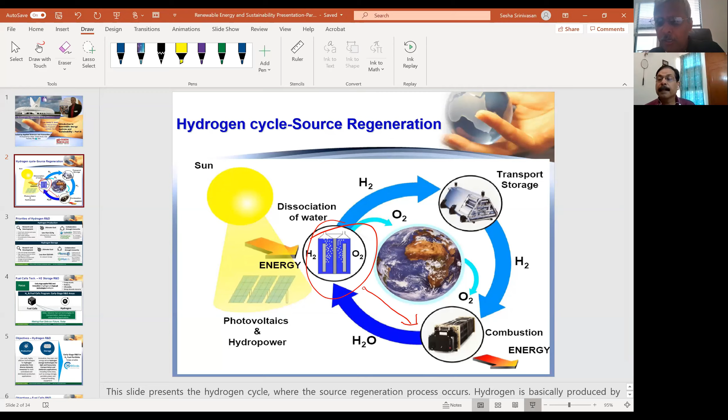Hydrogen you can produce from water and use it in an engine to burn or combust the hydrogen, or you can store the hydrogen in metal hydrides or any other medium. The overall byproduct of hydrogen combustion is water. Water is very benign; you can use it for drinking. So it does not contribute any carbon dioxide or carbon monoxide. It is free from greenhouse gases. There are challenges in using hydrogen technologies for fuel cells or internal combustion engine applications.

Okay, so let's look into the deeper side of it. In order to produce hydrogen for vehicular or stationary applications, the hydrogen production cost must be around $2 per kilogram. You need to produce within that cost range. Right now, we are spending more, like $16 to $20 per kilogram. So that is a challenge.

The second thing is hydrogen needs to get stored, because if we don't store the hydrogen, you cannot constantly run water to produce hydrogen and use it. You need a storage device. For the storage device to be cost-effective, you need at least $8 per kilowatt-hour of hydrogen storage. Hydrogen storage is a big challenge too. So implementing hydrogen for production, storage, and utilization all has to work out simultaneously so that you can use the hydrogen in fuel cells.

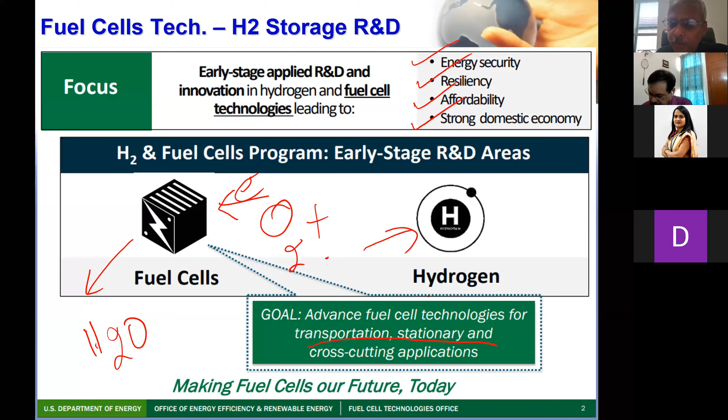So there are big challenges like the transportation sector and the stationary applications. You need to use fuel cells that use the hydrogen produced from water or fossil fuels. So we'll talk about that.

What are the objectives for hydrogen production? The objectives are you need to produce low cost, highly efficient technologies for producing hydrogen from domestic resources.

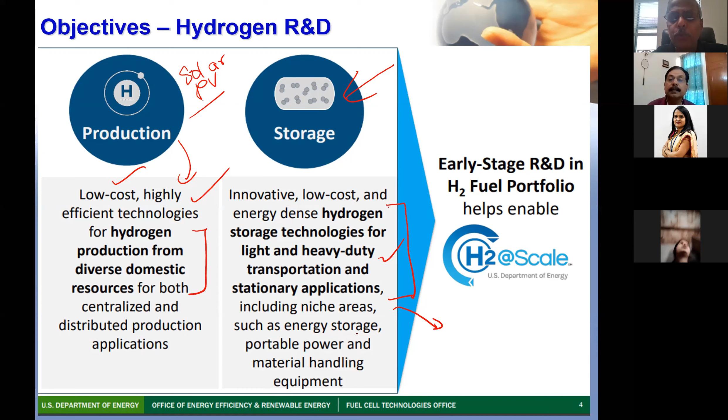So when I say hydrogen production, you need to produce hydrogen sustainably and from renewable energy sources like water, sun, or nuclear. You cannot use non-renewable sources. You need to use only renewable sources.

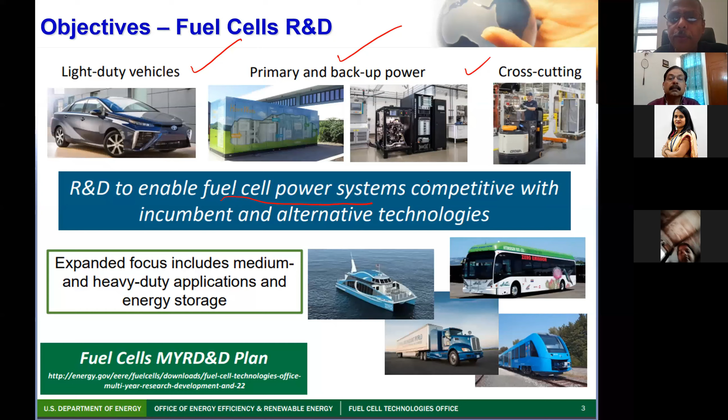For hydrogen fuel cells, the hydrogen combines with oxygen. Hydrogen fuel cells are used for the transportation sector, for backup power, or for laptops or other electronic applications. The fuel cell power is nothing but taking hydrogen and oxygen and converting it into electricity to drive your vehicles. This is completely free from carbon dioxide.

The cost is very challenging because producing hydrogen, right now you have to always compare it in terms of gallons of gasoline equivalent. Right now we use gasoline in our cars and vehicles. In the US we say it's gasoline. It's the same thing as petrol, petroleum. So you need to convert that in terms of prices.

Right now, the gasoline gallon equivalent is $16 for every gallon. One gallon is 4 liters. 4 liters of gasoline, kerosene, or petroleum is equal to $16.

But the Department of Energy's ultimate target is to go down to $4 per gasoline gallon equivalent. So that's a challenge there. There's a big gap there.

You're going from natural gas, a fossil fuel, to produce hydrogen, to electrolysis. The electrolysis process is highly renewable compared to natural gas. You can also produce hydrogen from methane. CH4 is methane, you get carbon plus H2. You can get that, but that has some carbon footprint.

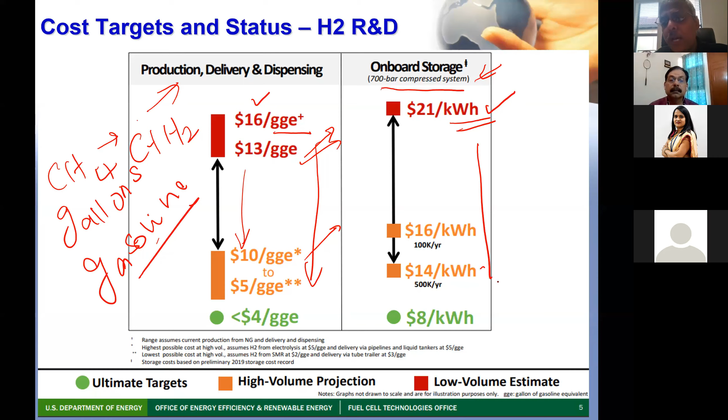Then hydrogen needs to be stored. Right now they store hydrogen at 700 bars, 700 atmospheres, in compressed cylinders. They pay $21 per kilowatt hour to store that 700 atmospheres of hydrogen. But that cost has to go down. That's a big challenge as well.

The next big implementation is fuel cells. Fuel cells are very expensive, but can be applied for clean energy and green energy. Right now the fuel cell cost is $40 per kilowatt of energy produced. That's very expensive. The Department of Energy wants to bring it down to $30, while keeping 65% efficiency, and the durability should be increased to 8,000 hours.

Right now, the gasoline car with an ICE, internal combustion engine, has only 30% efficiency. The rest of the 70% goes as waste heat. The fuel cell is a device which converts up to 65% efficiency, which is 2 to 3 times more than internal combustion engines.

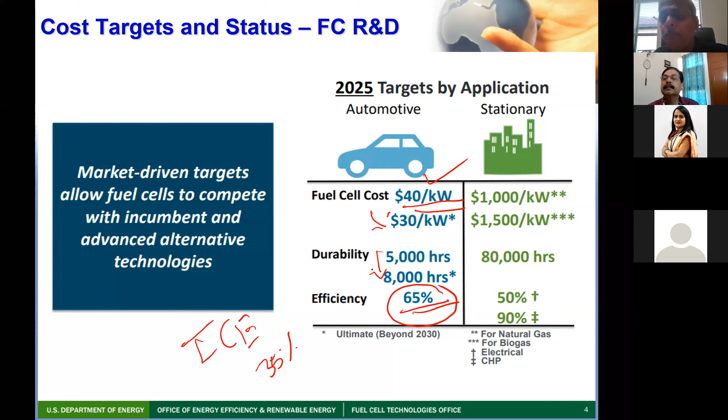You can either produce it from fossil fuels or coal, because in the US, or in India, we have a repository of coal. You can produce hydrogen by burning coal.

You can also produce hydrogen using steam methane reforming, that is SMR, or from waste products like biomass feed, using digester technology. Or you can produce it via solar PV photovoltaics, like low temperature electrolysis, high temperature electrolysis, or direct solar thermochemical. Solar thermochemical means you have solar energy and a thermochemical reaction occurs, producing hydrogen.

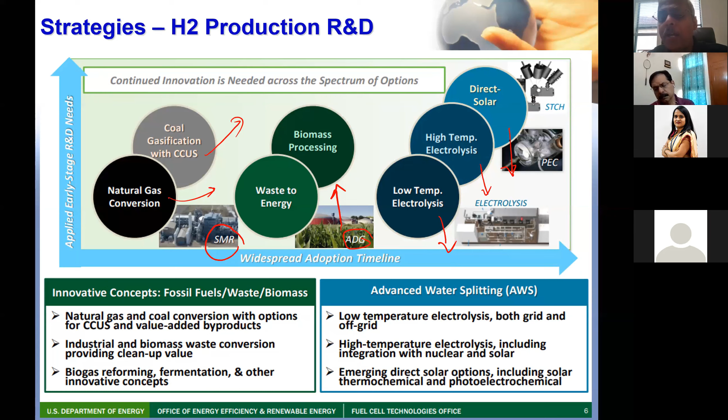So each technology has its pros and cons, advantages and disadvantages. You need to understand why hydrogen is taking too much time to come into the market, because there are intrinsic problems with each technology to address, not like electric vehicles, which I was talking about last week.

The same thing applies to hydrogen storage. You can store it, but why do we need to store hydrogen? Because otherwise, hydrogen is a very light gas. If you just let it out, it will evaporate.

Once if it leaks, then all the hydrogen is gone out. You need to store it in high pressure cylinders like composite cylinders, or liquid hydrogen like the BMW cars are running with cryocompressed liquid hydrogen, or you can store it in low pressure hydrogen carriers using materials. Materials technology is very important. I'm working on hydrogen storage, where we have to develop materials for storing hydrogen reversibly, like carbon materials, single wall nanotubes, graphene, or other complex materials.

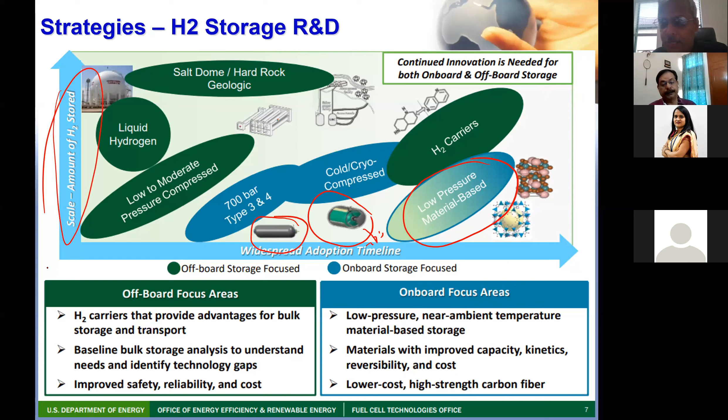So there's a big challenge. The scale of hydrogen storage has to be increased. That is very essential to keep up. And then the fuel cell technology, as I said, we need to increase the durability to 8,000 hours, or you can reduce the cost to $30 per kilowatt. There are big gaps that need to be addressed.

That's why we call it PGM free. PGM is platinum group metal based materials. You are not supposed to use lead as a base for developing the whole catalyst for working in fuel cells. That's a big challenge. There are many gaps that need to be filled so that you can get hydrogen fuel cell cars into the market and commercialize them.

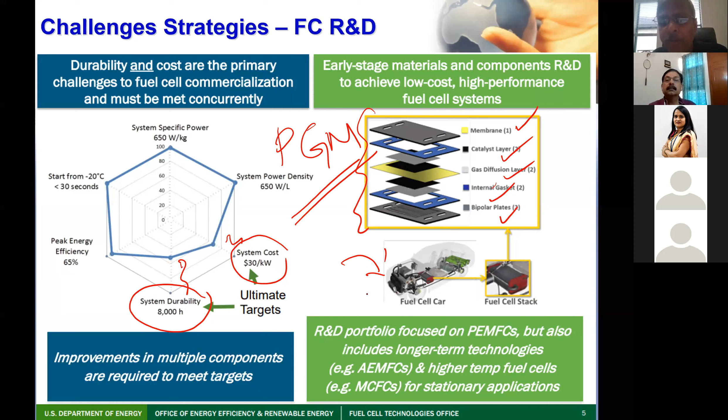So for production or utilization, hydrogen is a source of energy. If you calculate the equivalency of gasoline with hydrogen, hydrogen is 2 or 3 times more than gas equivalents in terms of energy density. So the energy density is higher, so you can use it for transportation, or for syngas production. You can also produce synthetic gases, or use it for combined heat cycles or metal refining. Hydrogen can be used for many processes.

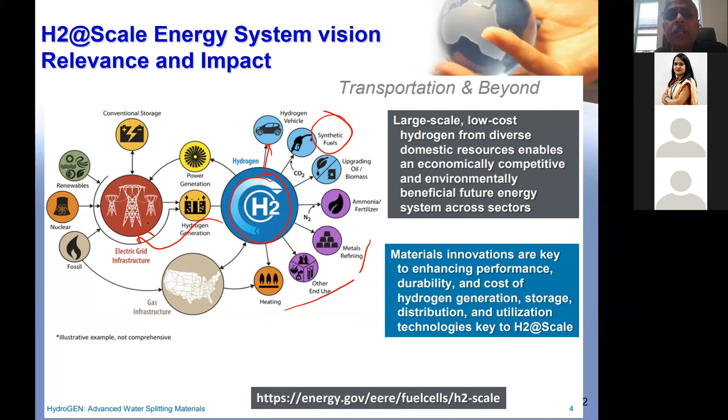At the same time, hydrogen can also be used for electricity production, for grid electricity, and you can use it as a renewable energy source. When I was working with BHU, Banaras Hindu University, I worked heavily with one of the professors, Professor O.N. Srivastava, who is a Padma Shri awardee, working on these hydrogen technologies for vehicle transportation.

So overall, in order for hydrogen to come into the market, your materials need to be designed uniquely, so that you can get materials development, the discovery of materials and development of the material, optimization, system integration, and certification. All this process goes in a chain reaction, so that you can get hydrogen compatible materials, breakthroughs in hydrogen storage, advanced splitting for hydrogen production, or fuel cell developments. It's a big R&D effort needed for materials working across different sectors.

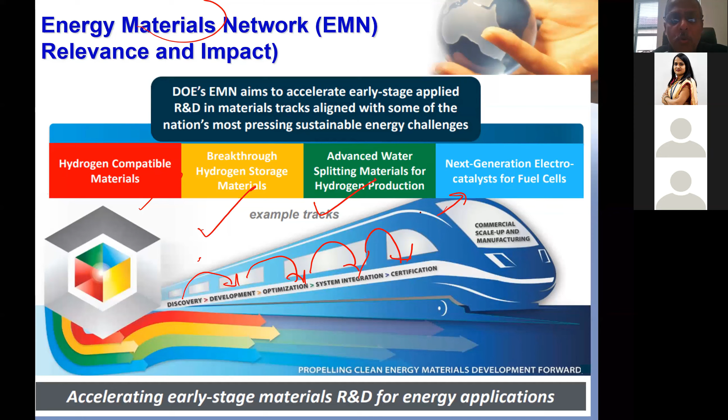All right, for production, you have 3 or 4 different techniques. You can use photoelectrochemical solar hydrogen production, or direct solar thermochemical hydrogen production, or low temperature electrolysis, or high temperature electrolysis. There are a number of energy labs in the US and in India working on solar hydrogen production, so that you can keep down the cost, or at least cut down the cost, so you can use it for hydrogen fuel cell applications.

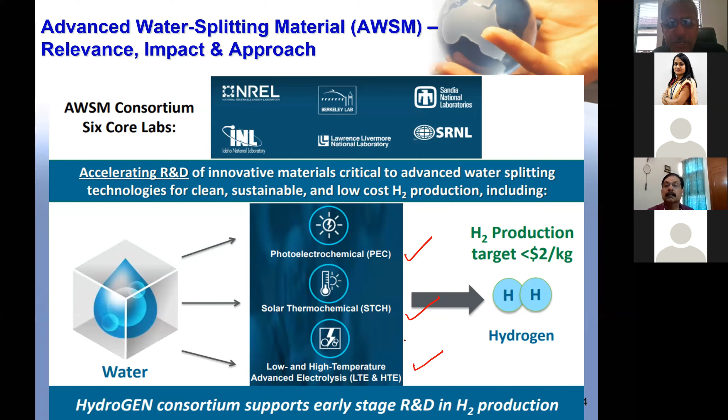As I said, there's low temperature electrolysis. There's a whole new area of PGM-free membranes, electrocatalysts that need to be developed, anion exchange membranes that need to be developed, and electrodes. It's a big electrochemistry challenge, where you need to develop the material science to improve the electrodes and electrocatalysts. The same applies for photoelectrochemistry.

We also again need to go for PGM free catalysts. Then you have to use earth abundant catalysts or layered perovskite tandem junctions, because right now photoelectrochemical hydrogen production is only about 15% efficient, which isn't a lot. So you need to go for triple junction or multiple junction tandem solar cells, so you can increase the efficiency to 30 to 45%. That's ideal for converting water into hydrogen and using it for fuel cells.

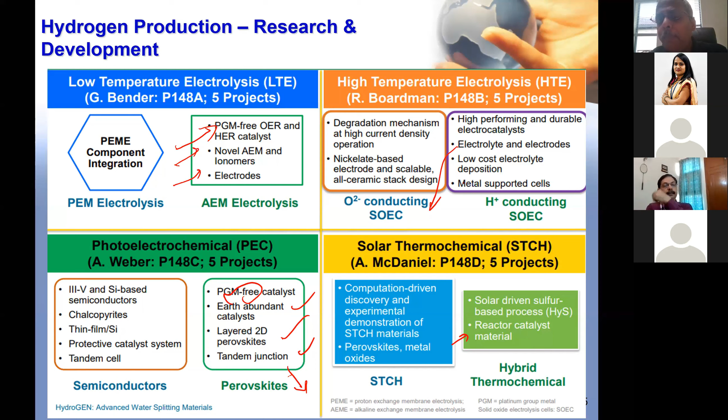For solar thermochemical production, you need to have a reactor material which should be stable at very high temperatures. Then for high temperature electrocatalysts, again you need to work on temperature stability and develop metal support catalysts.

Overall, this is a story about how you can use fuel cells in two different processes. One process is called the electrolyzer. RFC stands for reversible fuel cells. The fuel cell is nothing but two electrodes, a cathode and anode separated by an electrolyte that produce hydrogen to go into the electrolyte, and then it reacts to produce energy.

In the initial electrolyzer mode, hydrogen is produced from water, and plenty of hydrogen goes and feeds into the fuel cell. The electron comes from electricity coming from the utilities. Then hydrogen to electron produces hydrogen gas, so that means it's water splitting. You need to split the water into hydrogen and oxygen, so hydrogen can go into the vehicle storage device, and oxygen can go into the atmosphere.

In the reverse process, when I feed the hydrogen and oxygen back, I can produce my electricity back. That's a reversible fuel cell which does the job. The main thing is your production needs to be improved, your storage needs to be improved, and your fuel cell needs to be improved. This is a big challenge, but it's a doable challenge. We are working on hydrogen storage, hydrogen production, and fuel cells to some extent.

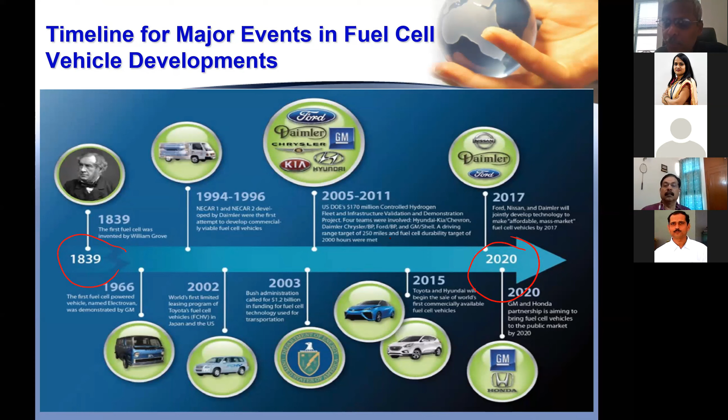Do it instantaneously, like fuel cell development. If you look from 1839 all the way to 2020, many companies like General Motors, BMW, Honda, every car manufacturer, are going for alternative vehicles, whether all electric, plug-in hybrid, or fuel cells. This is a big R&D effort to use hydrogen technologies so that you can reduce global warming or carbon dioxide footprints.

The difference is in the process of a direct hydrogen tank. You can have your hydrogen tank in the car, and you need to store the hydrogen and use it, and use external power so that you can feed electricity, and hydrogen is there to work and produce power. That's one process called direct hydrogen usage for fuel cells.

Or the second one is reversible electric vehicles. You need to have a charging station in between for the vehicle, so that the charging station feeds the hydrogen, and the electric vehicle or fuel cell converts that hydrogen back to produce electricity. So the main thing is about the infrastructure — we need the infrastructure so that this technology can be very viable for us.

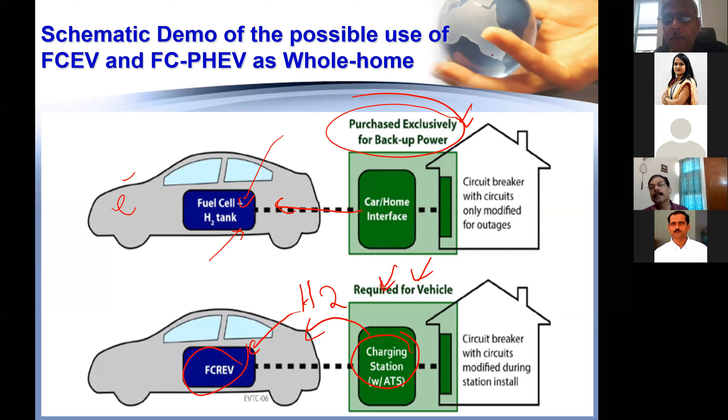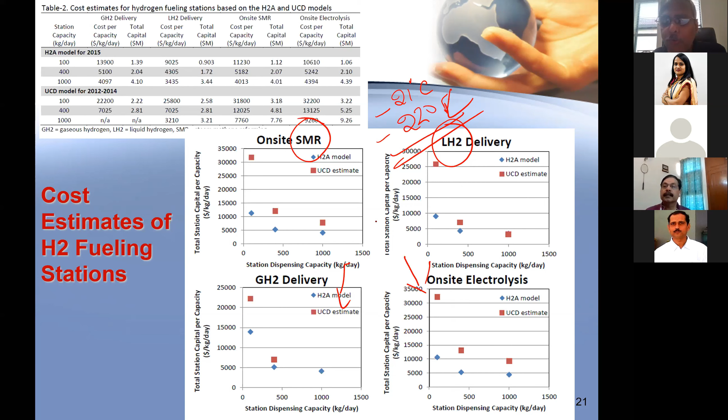You have a number of technologies like steam methane reforming or liquid hydrogen — you have to liquefy the hydrogen. You need to go to minus 210 degrees Celsius, or probably minus 220 degrees Fahrenheit. That's a very low temperature — you need to cool the hydrogen below liquid nitrogen, or you can use on-site electrolysis or gaseous hydrogen. But still, we are not yet there to reach the demand, which is exponentially increasing.

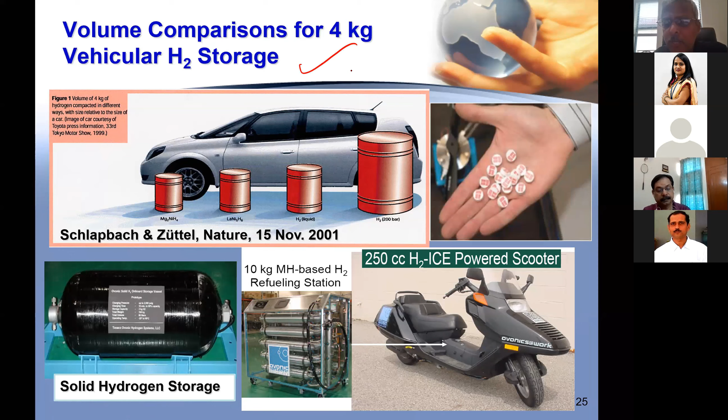The hydrogen needs to be stored, which is my concentration, my expertise in this. We developed the hydrogen motorcycle back at BHU — this motorcycle runs on hydrogen, which we developed, and the genset is running with the metal hydride tank, which is loaded with the hydrogen.

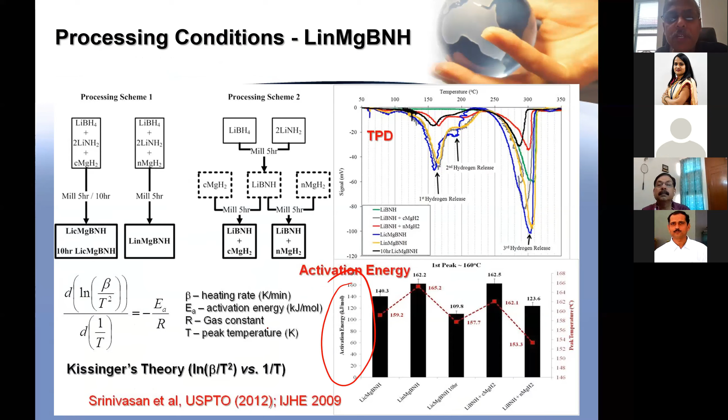Number of patents I published for the method of storing hydrogen efficiently, on materials development for hydrogen storage technology, and a patent in 2012 on how we use nanotech for producing and using materials to store and find hydrogen, hydrogen solid, and also use hydrogen for fuel cells. We developed some nanomaterials.

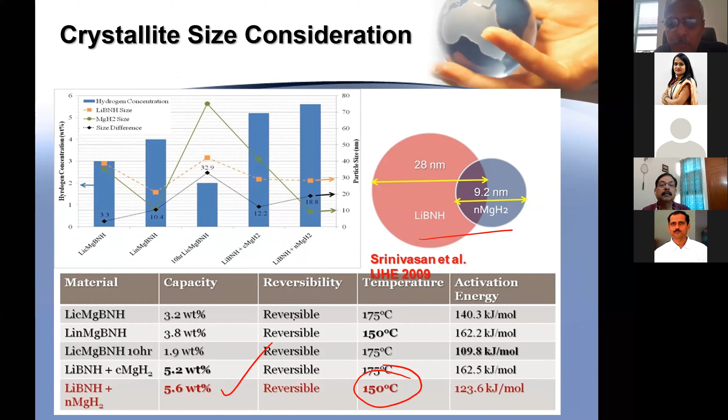This works up to 150 degrees centigrade, and we store about 5 to 6% of hydrogen in the materials. This is also our research on producing ammonia, but ammonia is not good for fuel cells directly, so we run the ammonia and crack it down to hydrogen and nitrogen using material science.

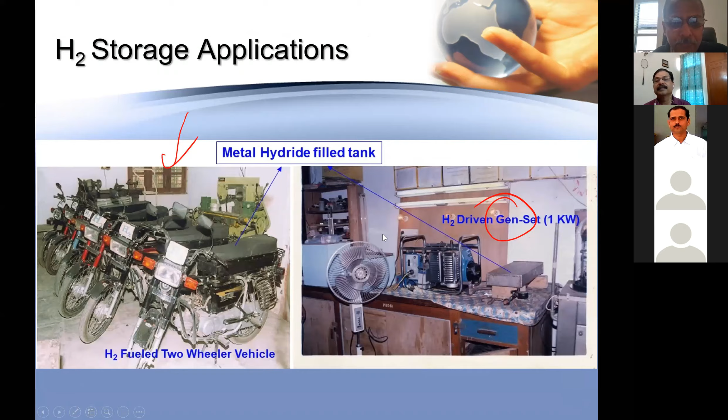Question from Dr. P.C. Jha: If we compare hydrogen as a fuel and solar energy, which is more beneficial cost-wise and efficiency-wise?

First, I will tell about the solar energy drawback. Solar energy is completely inexhaustible and renewable. The one challenge is off-peak, because if there is no sun or sunlight, then you need to depend on hydrogen storage, or you can use other modes. So that's the drawback of solar energy - handling the intermittent off-peak puts you in trouble, like you cannot use the solar energy.

But there are some techniques like solar thermal that convert directly into electricity. Yes, you can use it for electrical production, like PVs, for electrifying your homes, no problem. Solar PV is very good technology - they use photovoltaics for direct conversion. But when it comes to the transportation sector, you need alternative transportation methods, and hydrogen is much more promising compared to solar.

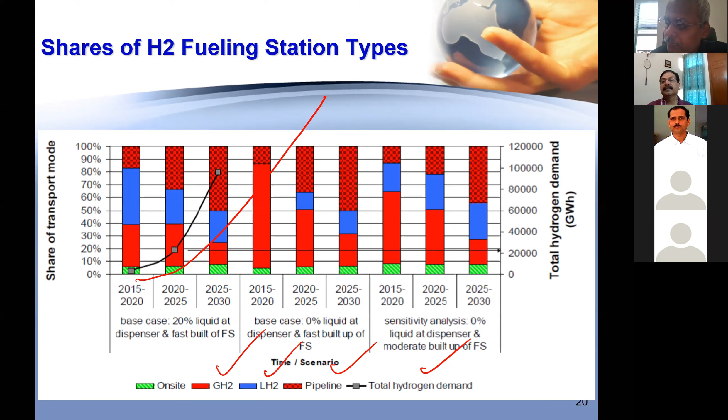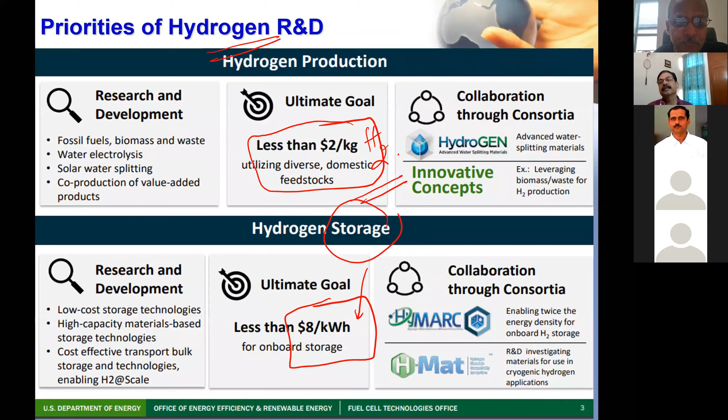Follow-up question: Can we combine solar and hydrogen, so that we use solar cells to split H2O into hydrogen, and then use that hydrogen as fuel in a vehicle?

That is a promising technology where you need sunlight, solar energy, and use it in your cars or home with PV cells - silicon, amorphous, or crystalline silicon solar cells - to produce hydrogen. The electrons from the PV are used for electrolyzing water to produce hydrogen. Yes, that's very promising, and you can use a combination of technologies. That's always promising.